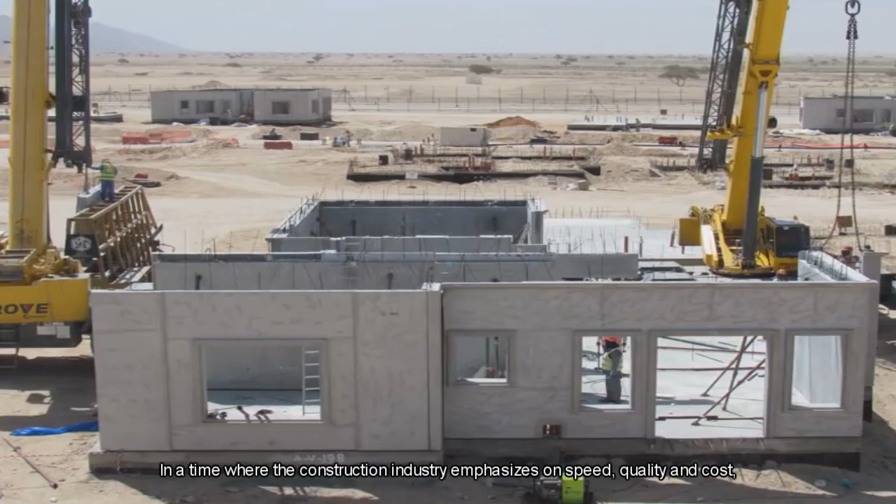In a time where the construction industry emphasizes speed, quality, and cost, we turn to the Industrialized Building System, IBS. IBS is a construction method where building components are manufactured and then transported on site to be assembled. Thus, IBS is quick and maintains high quality with low wastage. It requires fewer on-site workers and overall reduces costs.

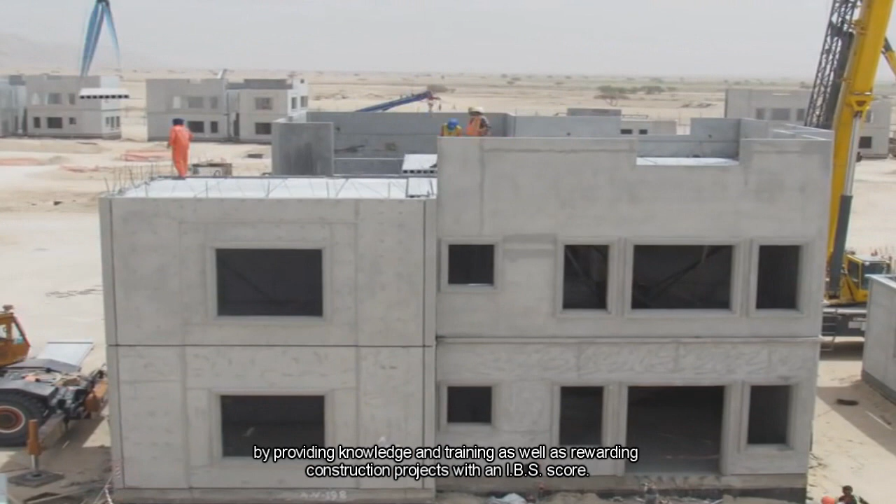Malaysia wants to supplement its economic growth with the use of IBS through its Construction Industry Development Board (CIDB) by providing knowledge and training as well as rewarding construction projects with an IBS score. The IBS score puts emphasis on the use of prefabricated components, use of standardized components, and its repeatability. The maximum IBS score for a building is 100 points.

The score is composed of 3 parts. Part 1: the structural system of the project, contributing a maximum of 50 points. Part 2: the wall system, with its maximum score contribution of 20 points. And Part 3: other simplified construction solutions, with the remaining 30 points.

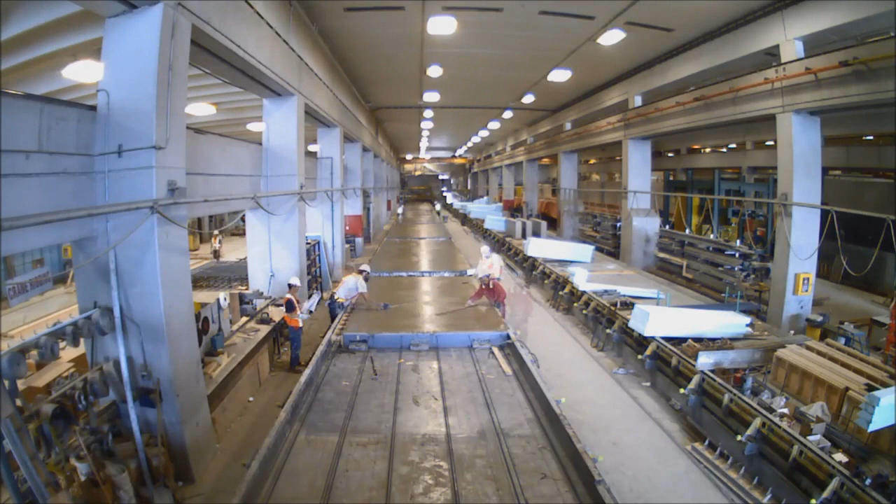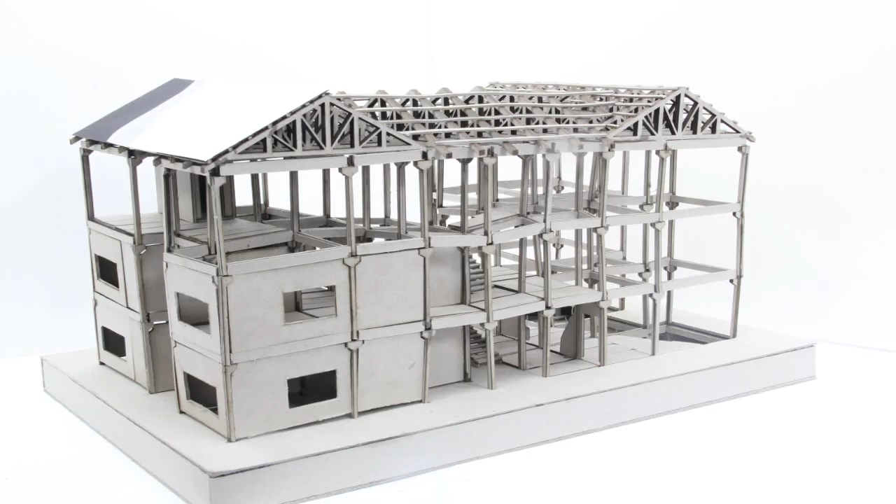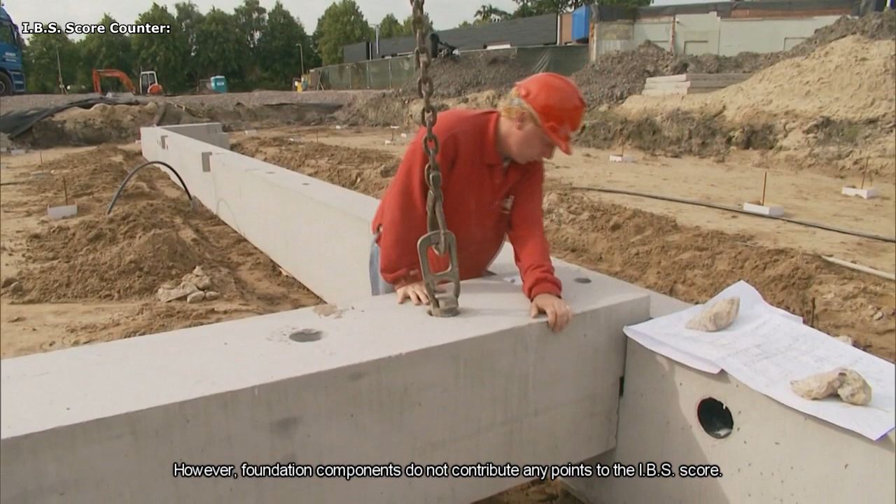The following apartment model construction time-lapse will show the IBS construction method and materials in relation to its scoring system. Precast concrete pad footings are laid on the excavation site while ground beams and slabs are attached. However, foundation components do not contribute any points to the IBS score.

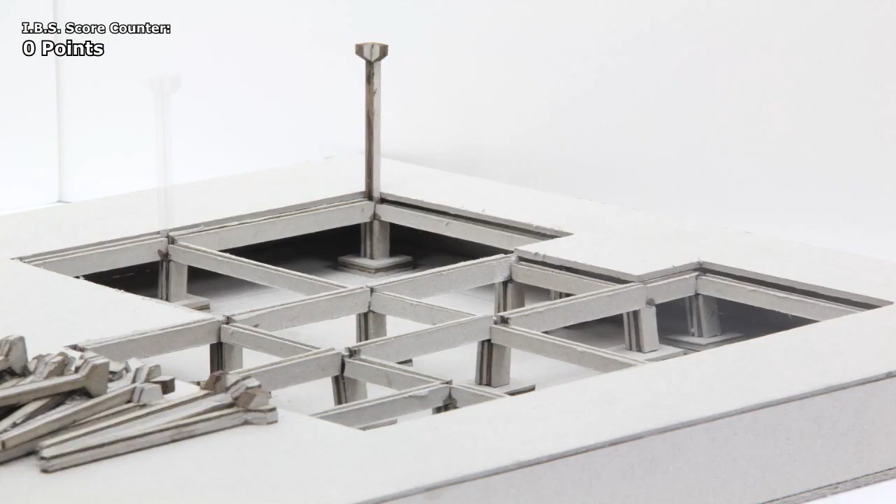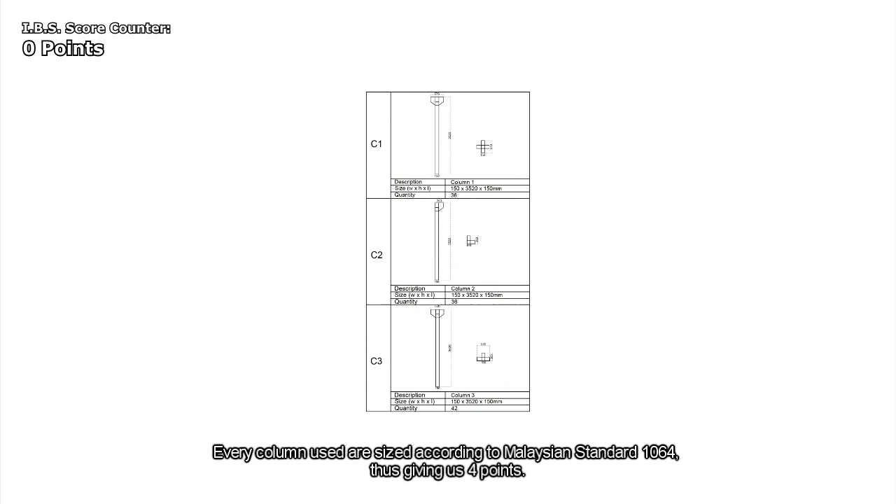Precast concrete columns are bolted on the footings and the joint connection is cast with concrete. The columns are attached vertically and the rebar in the center reinforces the connection. They are joined by bolts and the bolts are then grouted. Every column used is sized according to Malaysian Standard 1064, thus giving us 4 points.

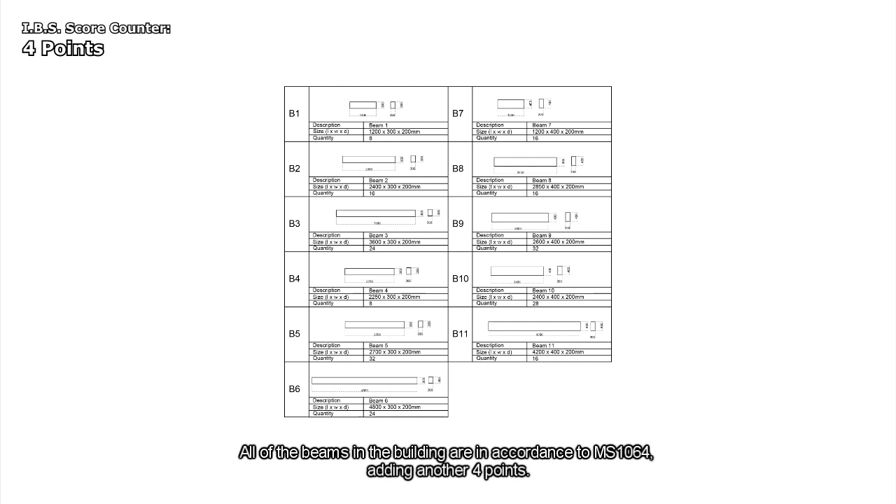The beam is placed on the bearing pads of the column corbel and is secured with a protruding rebar. The gaps in between are then grouted. All of the beams in the building are in accordance with MS 1064, adding another 4 points.

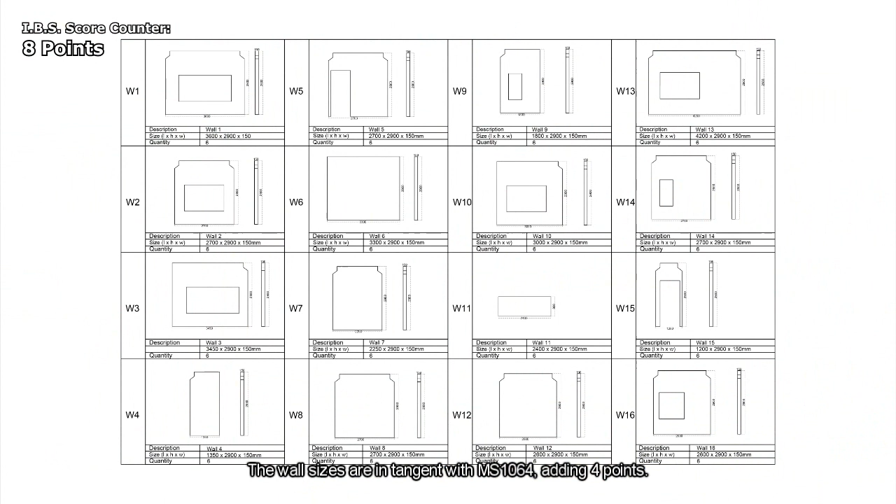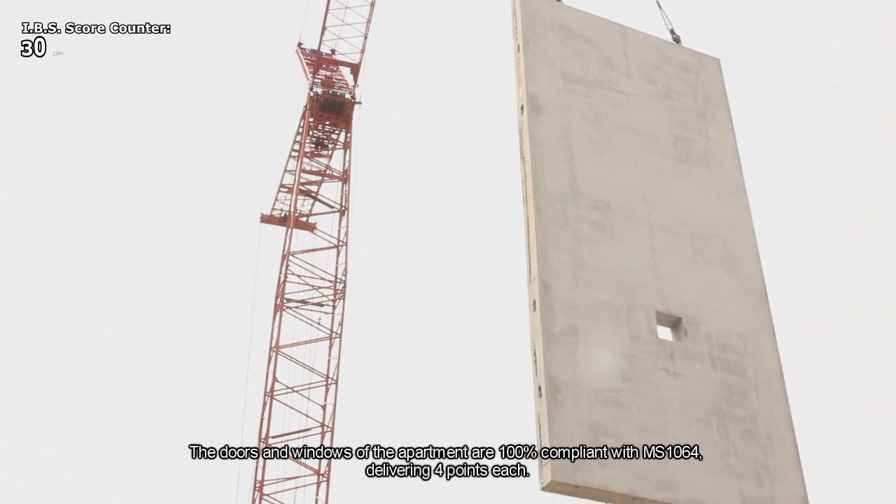The wall panels are slotted in their designated positions between the skeletal structure. The gaps are filled with grout to secure the walls. The wall sizes are in line with MS 1064, adding 4 points. The doors and windows of the apartment are 100% compliant with MS 1064, delivering 4 points each. As all the walls used are precast concrete walls, this brings us the full IBS score of 20 points for Part 2.

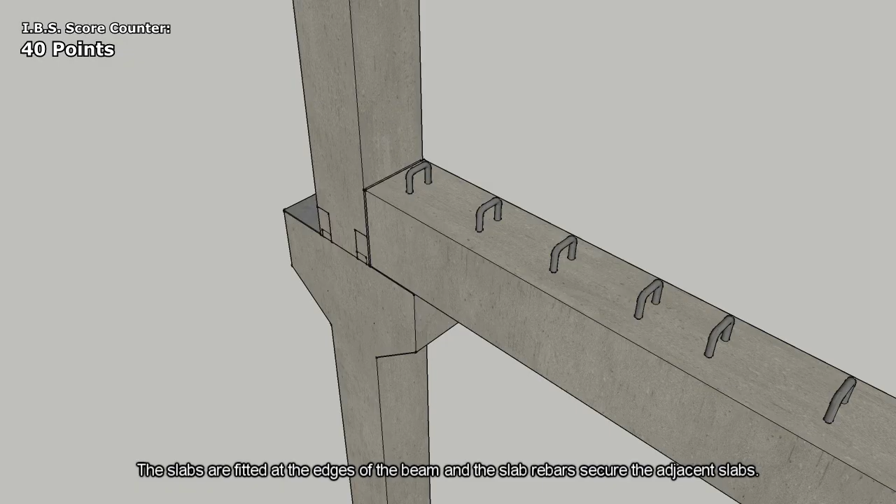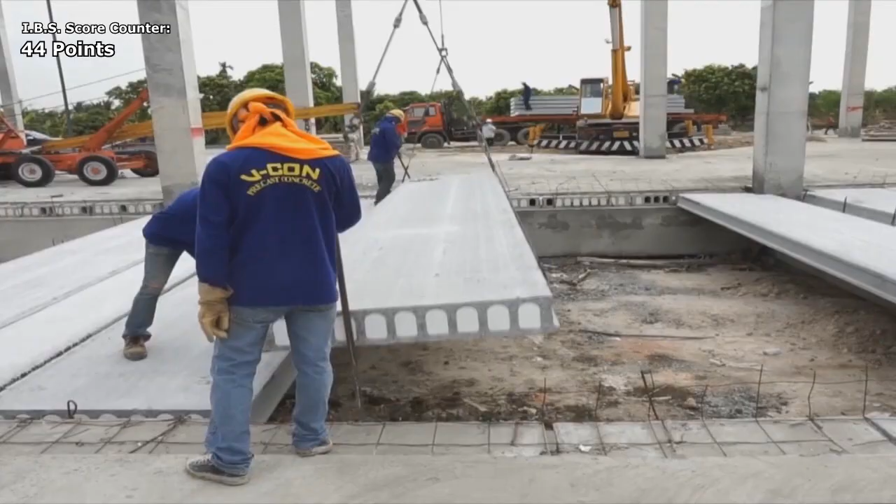The slabs are fitted at the edges of the beam, and the slab rebars secure the adjacent slabs. The gaps are then grouted. The slab sizes follow MS 1064, adding another 4 points. The landing and stairs are joined by concrete rebate and the gaps are grouted. However, the prefabricated stairs do not count toward the IBS score.

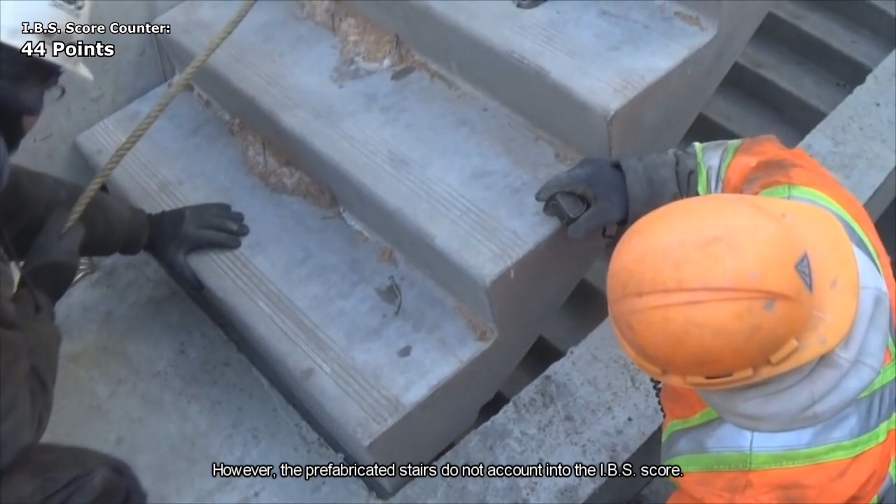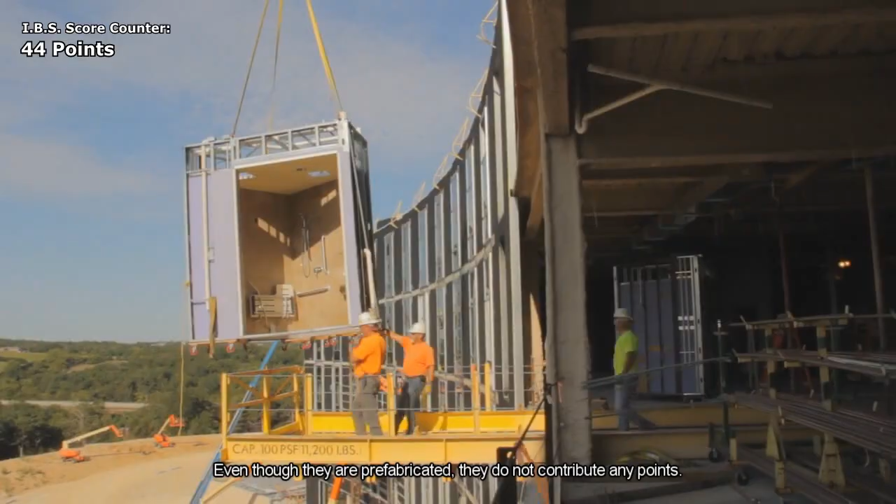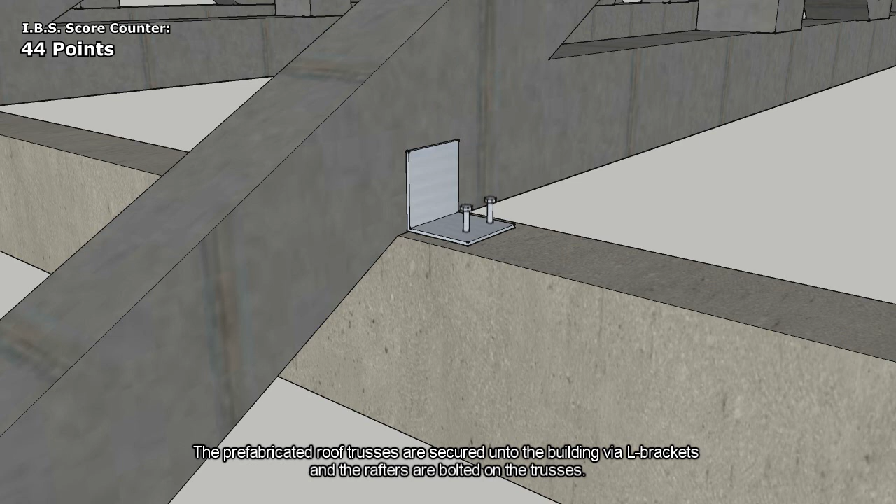Bathroom pods are used in this apartment, and they are slotted into their designated location. Even though they are prefabricated, they do not contribute any points. The prefabricated roof trusses are secured onto the building via L brackets, and the rafters are bolted on the trusses.

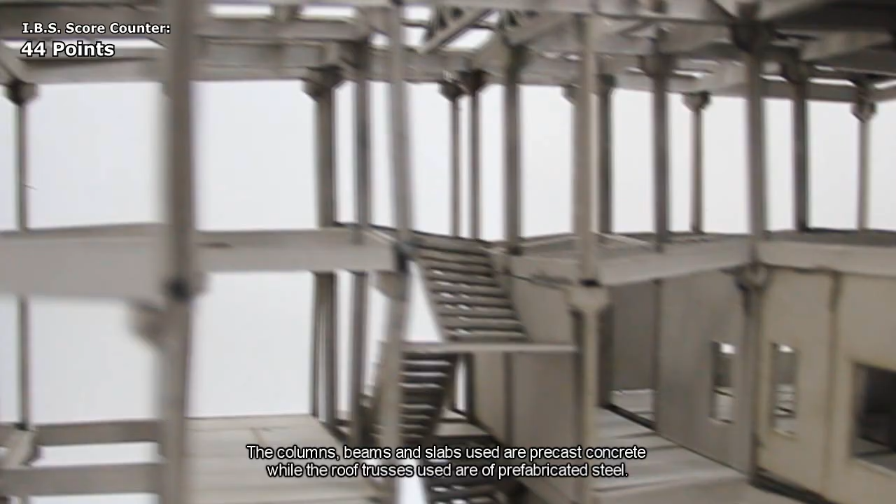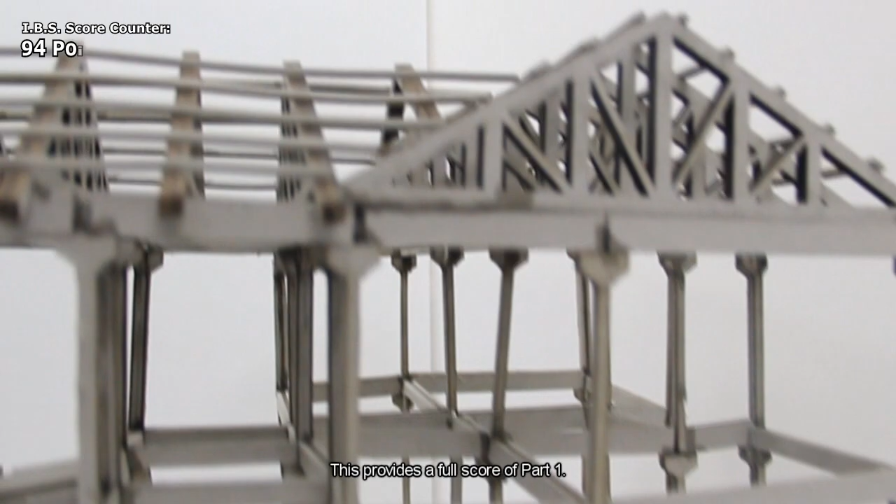The columns, beams, and slabs used are precast concrete, while the roof trusses used are prefabricated steel. This provides a full score for Part 1. Lastly, the repetition of floor-to-floor height as well as the vertical and horizontal repetition of the structural floor layout brings us a total of 6 points. Therefore, the total IBS score of this apartment building is the full score of 100 points.